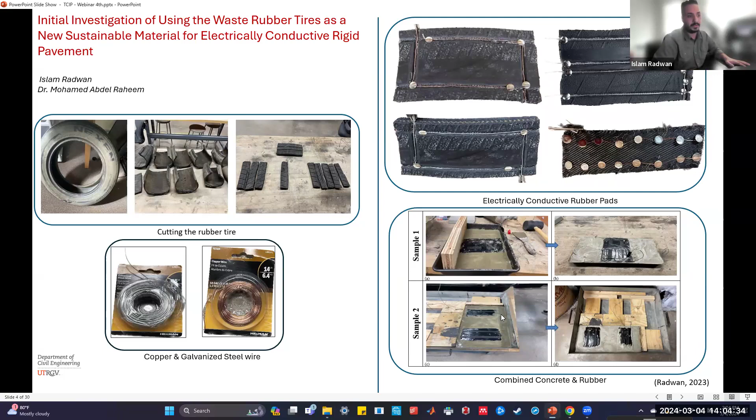We also did an experiment for snow melting. For combined sample one, after 60 minutes, the surface was completely dried while using ice cubes. The same thing for combined sample two while using crushed ice - after 40 minutes, we can see the snow disappeared.

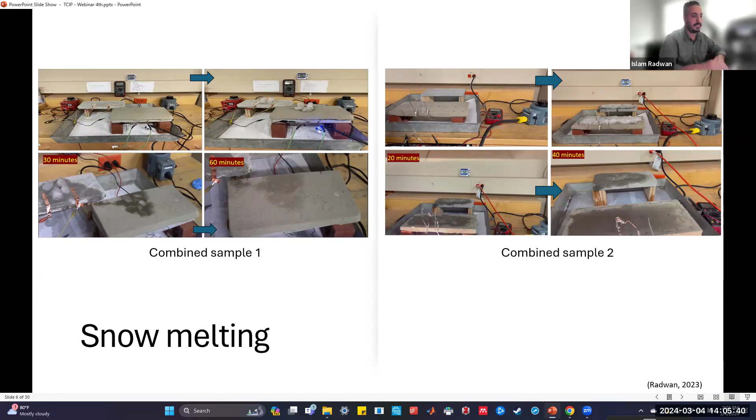That project motivated us to keep working on solving thermal problems related to precast concrete or rigid pavement. So getting back to our current project, which is cool pavement for mitigating the urban heat island effect using phase change material in precast concrete.

So at the beginning, what is the urban heat island? Urban heat islands are areas in cities that are significantly warmer than the surrounding rural areas due to urban development. Some studies say the ambient temperature of 450 cities increased due to the urban heat island phenomenon, which can negatively affect energy consumption, the environment, and people's health.

The same applies to forecasts of future cooling energy consumption related to residential and commercial buildings. They say that by 2050, it may increase up to 750% and 275% due to local and global climate change, and also the expected rise in cooling system use.

So what causes the urban heat island? Some of the main reasons are the surface properties. Urban heat areas have heat absorbing surfaces such as asphalt or concrete, and also the low albedo of these surfaces. The expression albedo means the ability of the pavement to reflect heat. So the lower the albedo, the more absorption by these surfaces.

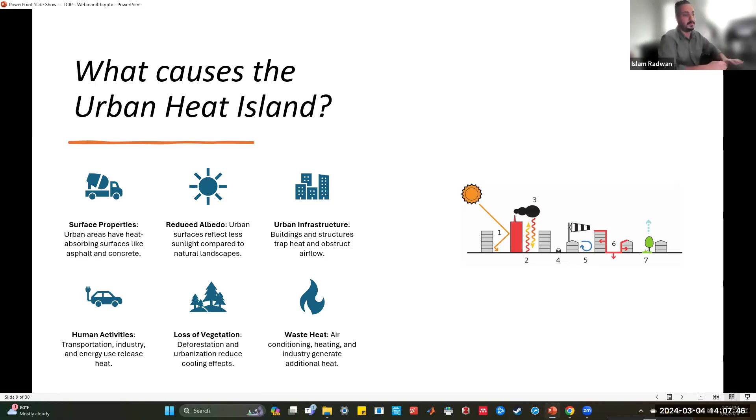So what can be the consequences of the urban heat island? Of course, infrastructure damages, because the extreme temperature causes thermal stresses, which can lead to cracks, warping, and compromise the integrity. Of course, it's going to result in overall higher temperatures within the cities. Also, the health risks—elevated temperature increases the risk of heat-related illnesses.

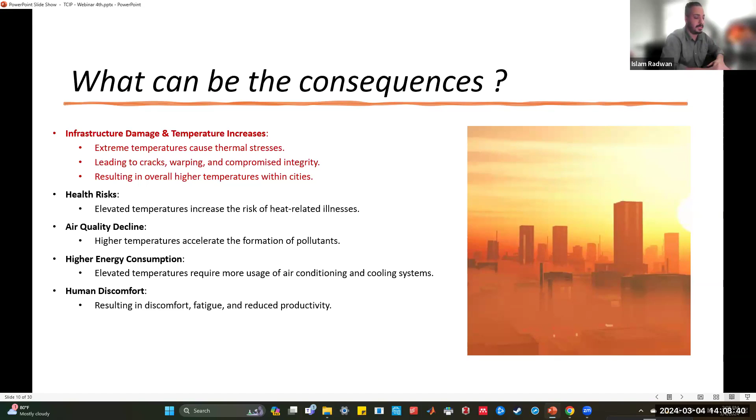Also, air quality—higher temperatures accelerate the formation of pollutants, leading to higher energy consumption. Elevated temperatures require more usage of air conditioning and cooling systems. Also, human comfort will be affected. The higher the temperature, the more it results in discomfort and fatigue, reducing the productivity of working.

So for surface heat islands, a study by Akbari and Rose found that between 29 and 39% of the urban heat island effect is related to paved surfaces. Therefore, the impact of pavements on urban heat island development is significant. That's why working on cooling the pavement is going to contribute to solving the urban heat island effect.

The cool pavement strategies—a lot of researchers have conducted several cool pavement strategies in their research. For example, some of them work on reflective asphalt pavement or reflective concrete pavement, trying to increase the albedo of these surfaces, or increase the reflectivity of the surface. Some of them work on making the pavement porous or permeable.

Also the water retentive pavement. Some of them work on heat harvesting pavement by extracting the heat or taking advantage of this heat, or making the pavement thermally conductive by adding thermally conductive materials such as carbon fibers or carbon black powder, or even metals sometimes. However, one of the most promising ways to cool the pavement is the integration of

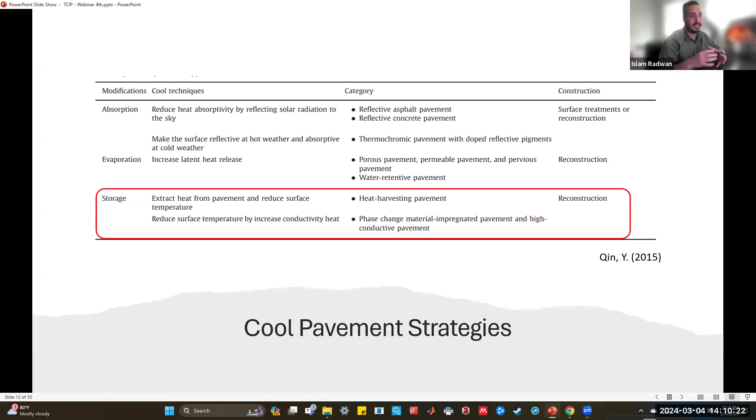phase change materials. The phase change material has unique characteristics of heat capacity, and that's what I'm going to describe in the next slides.

So the phase change material—what is it at the beginning? It is a heat fusion substance that melts and solidifies at a certain temperature. If we look at this curve, the temperature for the phase change material increases while the heat increases as well. This phase is called the sensible heat, until it reaches the melting point, which is 20 Celsius. At this point, the main characteristic of the phase change material works, which is it starts storing the heat, and all the heat becomes latent heat.

And this is the main characteristic that we are trying to take advantage of in the pavement. We are trying to increase the heat capacity of the pavement. We are trying to make the pavement store the heat, and we are trying to make the pavement temperature constant at this temperature as much as we can.

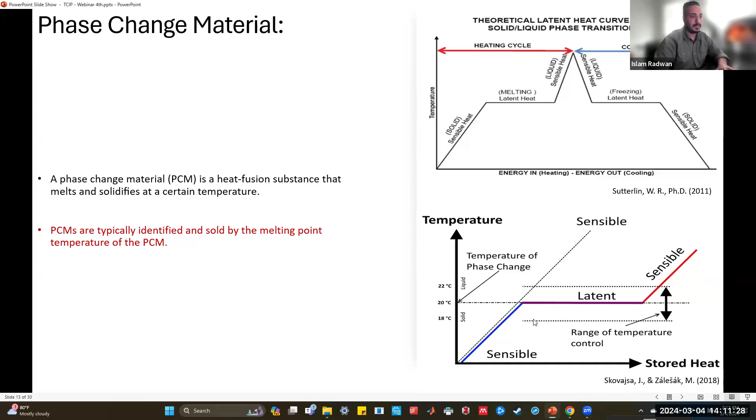So some applications of PCM—phase change materials exist as products in the market. In building construction, they use it for insulation, roofing materials, for thermal energy storage; they use it for solar power plants, for textiles as well, sportswear for temperature control and comfort; also for electronics cooling, food and beverage industry, the automotive industry, and medical applications for temperature controlled storage of biological samples.

Phase change material can be divided into three main types: organic, inorganic, and eutectic. Worth noting that in our research we're using the organic paraffin type. One advantage of organic PCM is that it's chemically stable and it's strongly recommended for construction materials. Inorganic PCM is corrosive to metal, so it's not effective for reinforced precast concrete. That's why we're using the organic type.

Researchers have developed four incorporation methods of PCM to use inside concrete. The first is LWA, lightweight aggregate. They use porous aggregate and immerse the PCM in liquid state inside the porous aggregate, then use that aggregate to make the concrete.

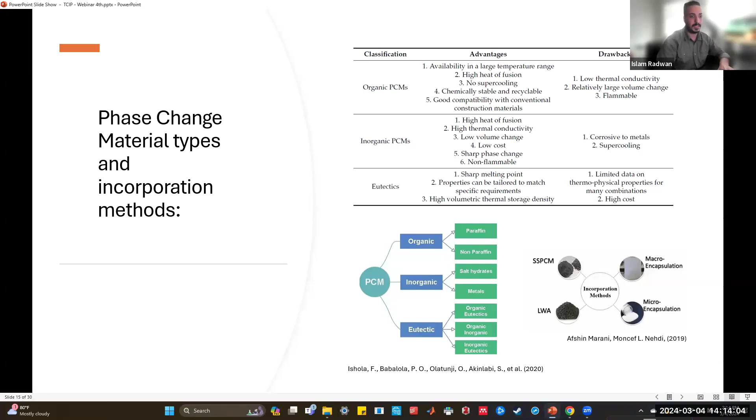The fourth one is micro encapsulation. I want to highlight that we are using this method in our research. The reason is because the product comes in powder form, which is easier to use in the concrete mix. That's why we are using micro encapsulation.

So, research main goal and scope of work. As mentioned, this study aims to explore the integration of microencapsulated phase change materials into rigid precast concrete pavement. The picture describes exactly what we are trying to do.

The phase change material is going to be inside the precast concrete, and here's the mechanism of the PCM. The PCM is in solid state, and once the temperature goes up, the latent heat phase starts, and it becomes completely liquid. Then the latent heat becomes sensible heat, and at night, while going back to the solid state, all the stored heat is released. That's what we are trying to obtain.

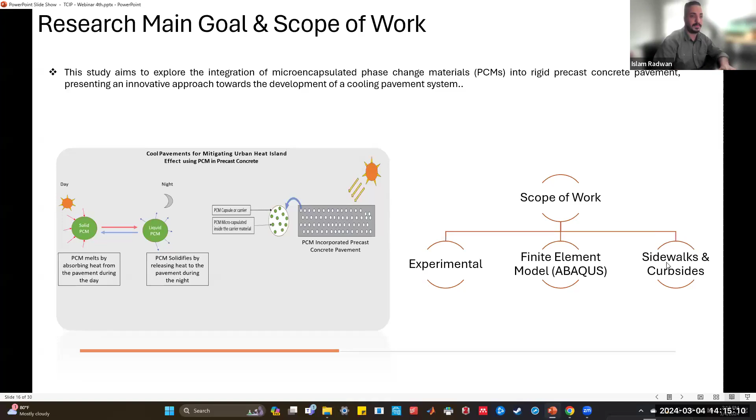Our scope of work includes an experimental phase, and also a finite element model using the ABAQUS software. Initially we are working on sidewalks and curbsides. We can divide the experimental work into four phases: the setup, the material, the physical material integration, and then the equipment.

This is a schematic heat simulation setup of the experiment we are trying to build. As we can see, it's a slightly big chamber surrounded with aluminum wrap and insulation. We have two stands, each with two light bulbs, which act as a heat source on the surface of the two samples.

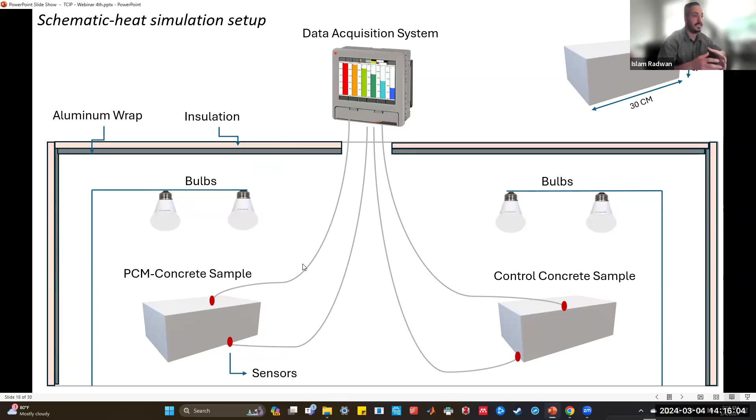We have a PCM concrete sample and a control concrete sample without any PCM. Both are connected to a data acquisition system by sensors to monitor the rise in temperature and also the rise in heat.

The first thing we did was contact a company called Microtek Laboratories. We gave them a brief about our project, and they gave us recommendations for two products. I want to highlight that the two products are already microencapsulated.

One of the main factors we considered when selecting the types of PCM was, as mentioned, the need for dry powders, since we need the PCM in powder form. Also the melting point, which is 28 Celsius, is one of the critical factors when it comes to PCM selection, along with the heat of fusion. The same applies for the MPCM 28 and the Micronal 28.

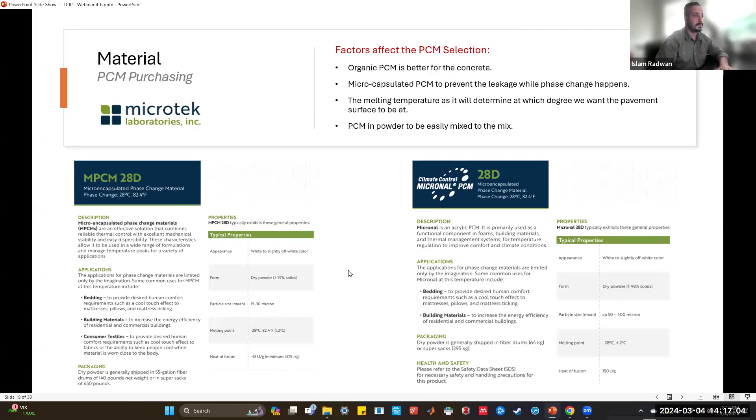Those are real pictures of the mixing. On the right-hand side, we can see the control concrete sample with 0 phase change material. We used the ratios 1 cement, 2 sand, 3 gravel, and 0.6 water ratio, and the coarse aggregate grade was grade 8.

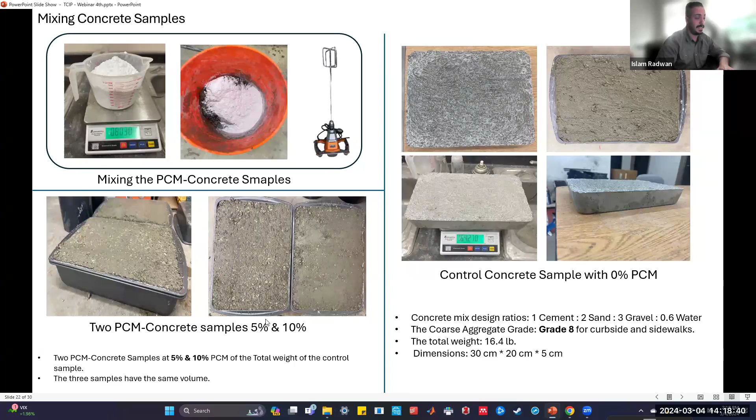On the left-hand side, we can see the mixing process of the PCM. As I mentioned, the PCM is in powder form, and we added it at the last step because it was strongly recommended to add the phase change material last in order to avoid breaking the shell of the microcapsule of the PCM. We made two PCM concrete samples, 5% and 10% of the total weight of the control sample. So we have 3 final concrete samples: 0 phase change material, 5%, and 10%.

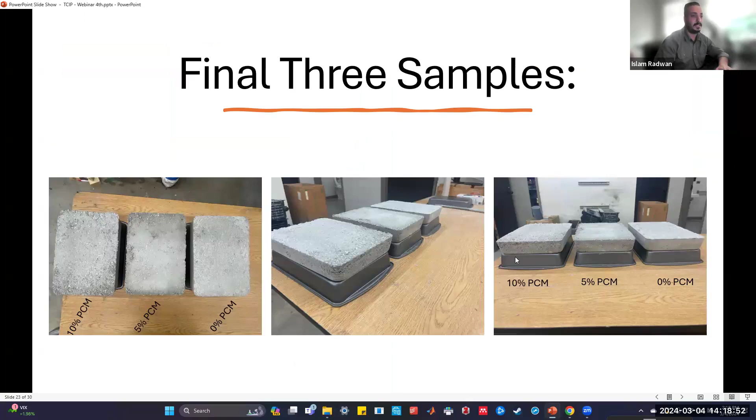On the other side, working on the finite element model, this picture describes most of the heat interactions on the pavement. Between the layers, between the concrete layer and the base layer, there is conduction, and also between the base layer and the sub-base layer, there is conduction too. The interaction between the concrete pavement and the atmosphere is called convection.

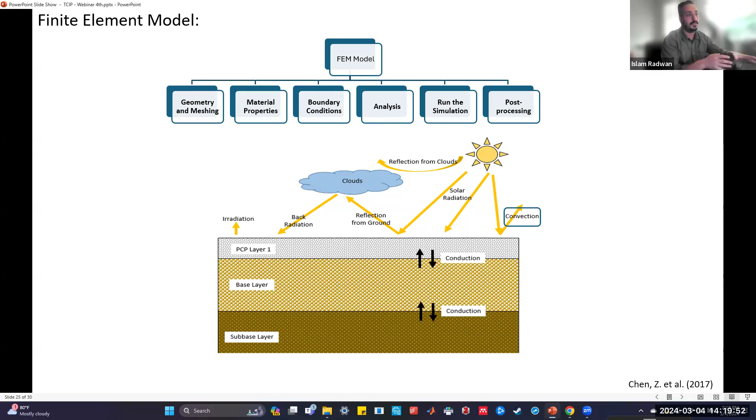I just want to highlight that one of the most important and critical steps for the finite element modeling is defining the material properties, because after adding the phase change material to the concrete it has new thermal properties. That's why we went to the second step to measure these thermal properties for our samples.

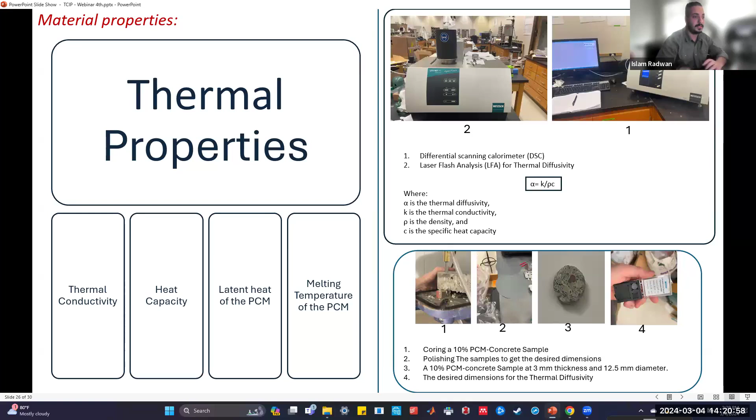I want to highlight that those are the main thermal properties we need to model the finite element modeling: the thermal conductivity, the heat capacity, and also the latent heat of the PCM, the melting temperature of the PCM. This picture shows the process to prepare the sample to use in these devices.

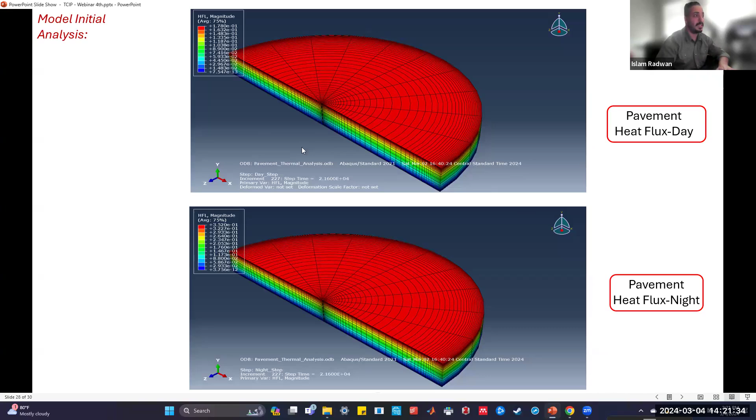Those are initial results for the model we did. The picture at the top is for the day step, and the one at the bottom is for the night. We can see here the heat flux on top of the pavement during the day is less than the heat flux on top of the pavement during the night. And that's exactly what phase change material does—it delays releasing the heat until the night comes.

Some expected results for this current research: of course, the surface temperature is going to be regulated due to the addition of the PCM, and also the heat capacity. As I mentioned, the heat capacity characteristic of the phase change material is really useful, so if we add it to the concrete mix, the concrete sample's heat capacity characteristic is going to be increased too. Both of these are going to affect the mitigation of the urban heat island. As I mentioned, the PCM absorbs and stores excess heat during the day and releases it gradually at night.

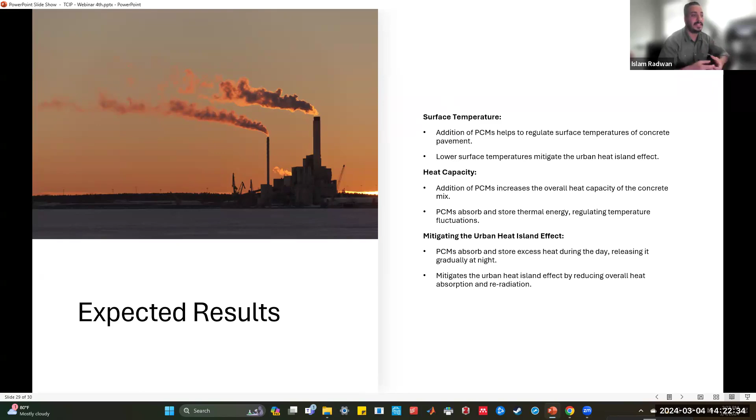That's it. Thank you.

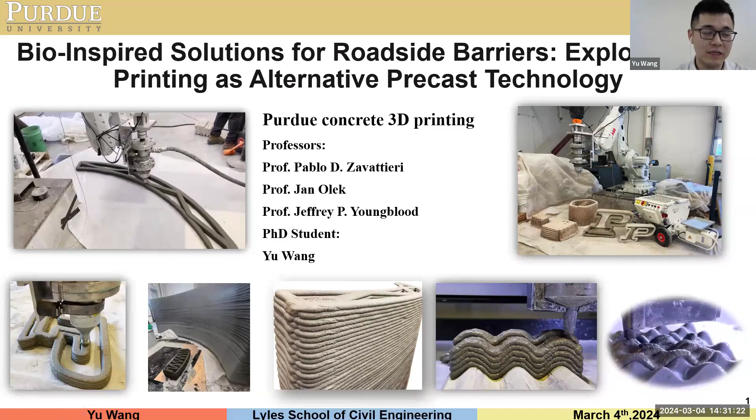I'm Yu Wang, I'm working on 3D printing concrete at Purdue University. Today I'm just going to talk about our project on bio-inspired solutions for roadside barrier applications. We are exploring 3D printing technology as an alternative to precast technology. So let me, in the next probably 5 to 7 minutes, do a brief introduction.

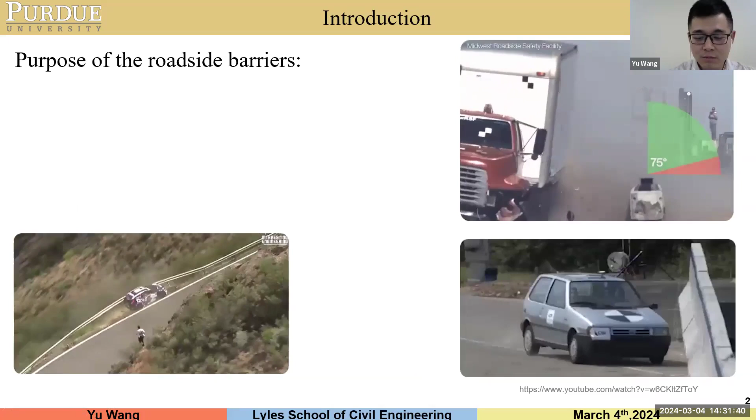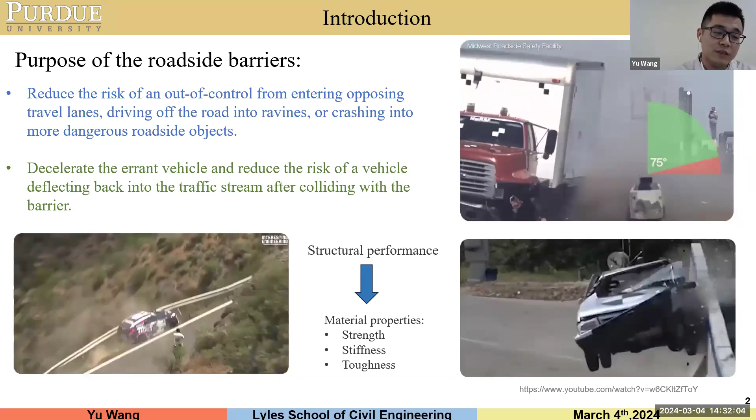About the roadside barrier: what is the purpose of the roadside barriers? The main purpose of roadside barriers is basically to redirect the vehicle and decelerate it to reduce the risk of the vehicle crashing into more dangerous objects. The structural performance is really important, and the material performance is also really important. In order to get good structural performance, we need to leverage the strength, stiffness, and toughness of our concrete materials.

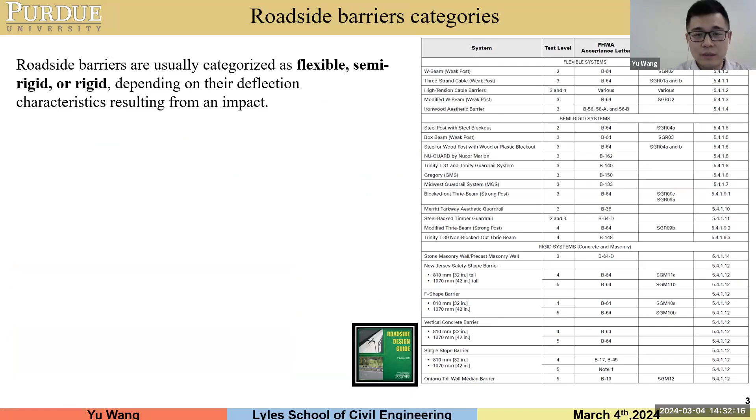From the AASHTO Roadside Design Guide, the barriers are categorized into three types. Flexible barriers are typically cable barriers and plastic barriers, semi-rigid systems like metal guardrails, and rigid systems, which are typically concrete barriers considered as rigid systems.

Different kinds of barriers have different applications, used in different test levels. Before a barrier is put into service, it needs to go through what we call a full crash test. These crash tests are leveled from TL1 all the way to TL5. TL1 to 3 are typically small-scale testing with small cars and pickup trucks, and when we come to TL4 and 5, they need to be tested under large trucks.

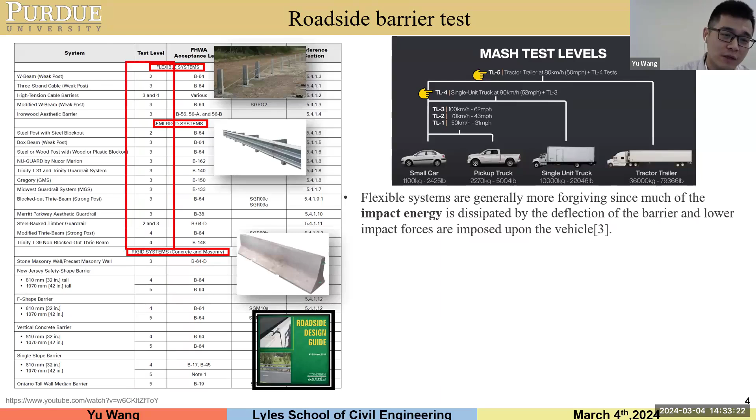Typically, flexible systems are more forgiving because of their flexibility, and more impact energy can be absorbed during impact. However, considering the strength limit, they can only be used under low level tests. If you see the table, they are mainly used under TL2 and 3. When we come to TL4 and 5, traditionally we consider the concrete barrier because of its ability to resist high impact loading to better redirect the vehicle.

Also in the table, when we come to TL4 and 5, there are a lot of different shapes of concrete barrier. Concrete barriers have a lot of advantages like high strength, and are also cost-effective compared to other systems. But all concrete barriers are considered rigid systems, which means they do not absorb energy during impact—they can only resist the impact load to redirect the vehicle. So can we augment the functionality of concrete to improve its energy absorption capacity?

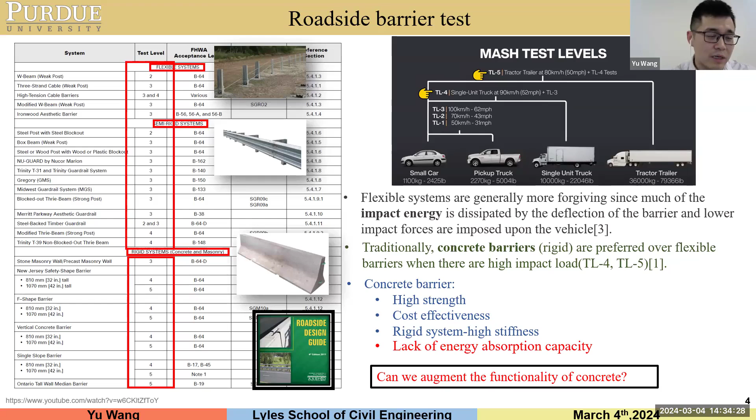So there are currently some solutions, let me explain a little more. Currently, concrete barriers have different shapes, like jersey barrier, F shape, single slope shape. There are about 5 shapes approved by AASHTO.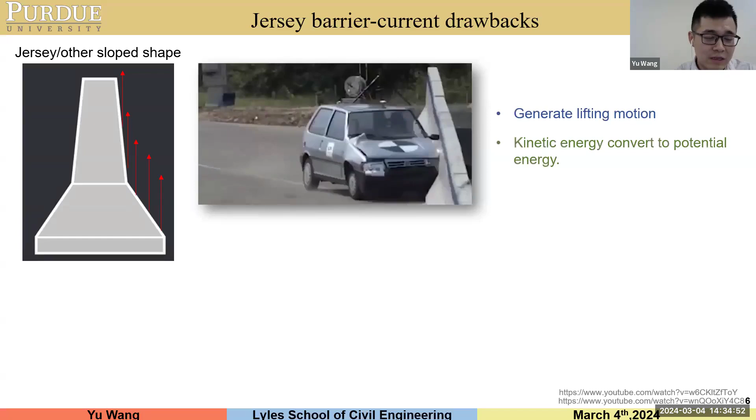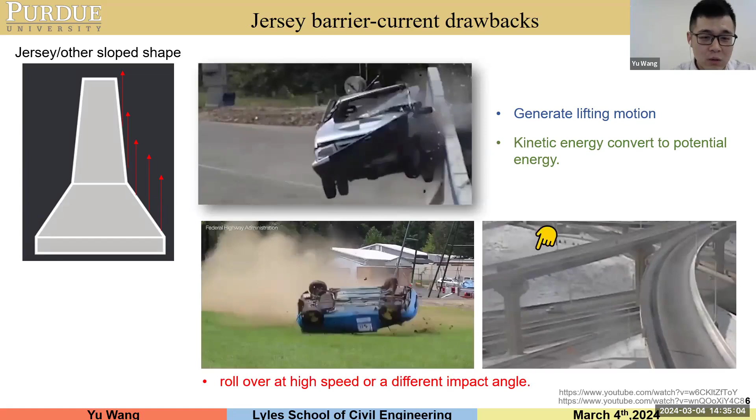How does the jersey barrier work, which you commonly see on the highway? When a vehicle rides up to the barrier, it generates a lifting motion. This lifting motion can dissipate some of the kinetic energy to redirect the vehicle and reduce the energy imposed on the car. However, under certain situations, like high speed or different impact angles, there's a chance it can cause a rollover of the car because of the lifting motion.

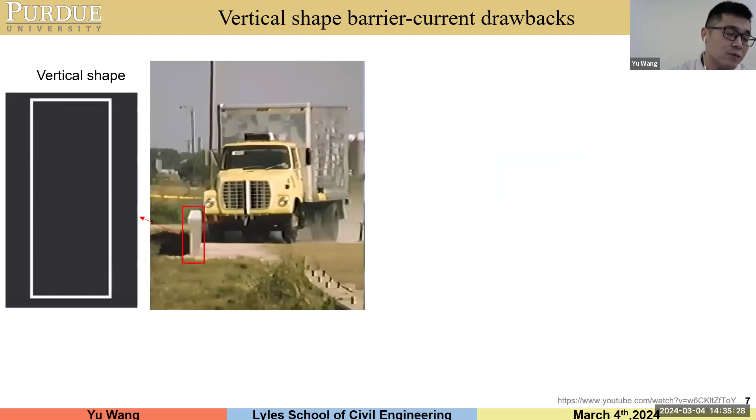So how do we address this drawback? How do we prevent this lifting motion? Maybe we can use other shapes, or we can improve the energy absorption capacity of concrete. There's a different shape, the vertical shape, which based on the design does not have a sloped shape that would lift the vehicle when it rides onto it.

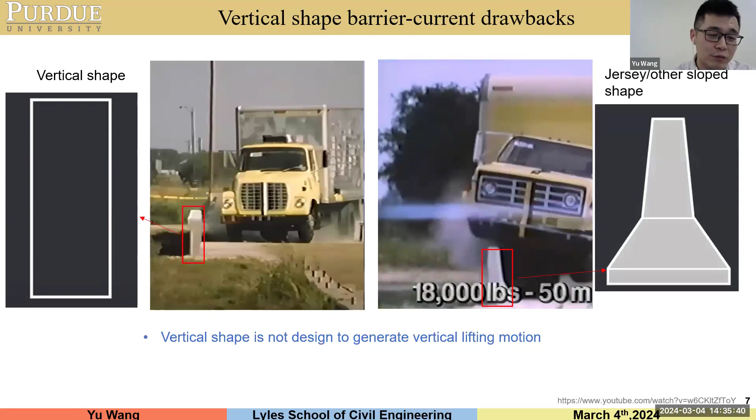It can prevent the lifting motion, which can prevent rollover, especially on large trucks. But if we drive on the highway, we typically do not see the vertical shape. This is because it does not generate the lifting motion, which means most of the energy is imposed on the car, which will cause more damage to the car compared to the jersey barrier.

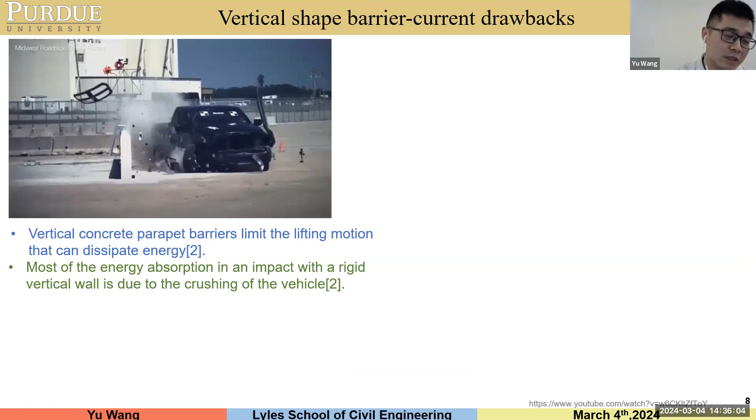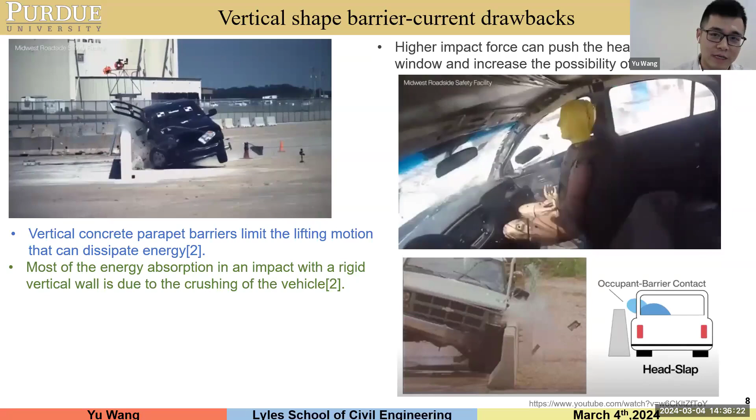And if there's a high impact loading, there will be what we call a head slap. If there's high lateral impact force, the passenger's head can pass through the window, and if the barrier is tall, there's also the possibility of crushing against the concrete barrier, which is really bad and can cause the death of the passenger.

So this brings us to the point that the existing concrete barrier is strong enough to redirect the vehicle back to the lane, but it has a drawback in protecting the driver and passengers. So that brings us to our point.

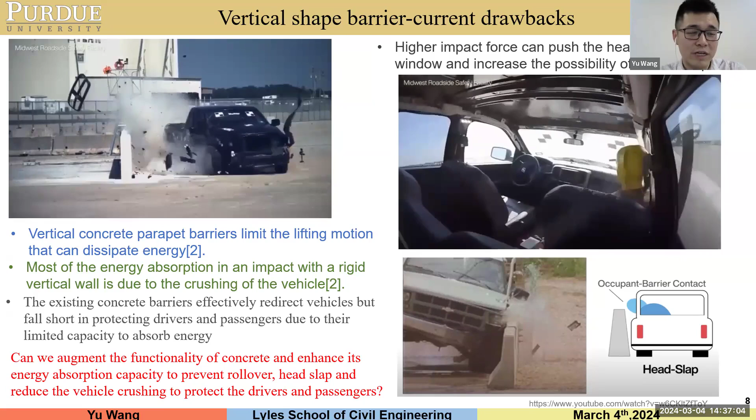Can we improve the energy absorption capacity of concrete barriers? Can we augment the functionality of concrete to improve the energy absorption of the concrete barrier to protect the driver and passengers? There are a few current studies and current solutions.

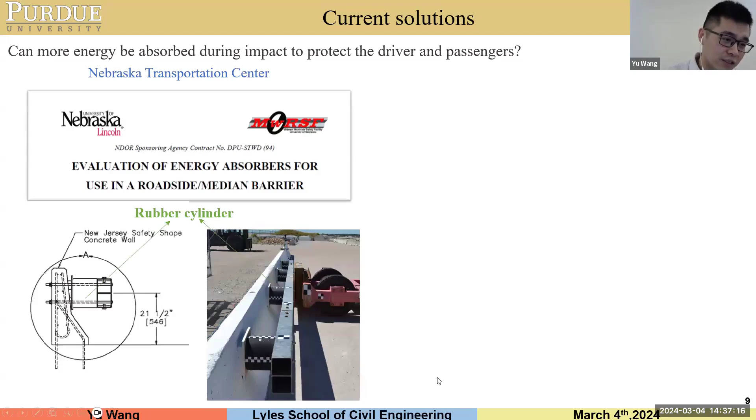The Department of Transportation of Nebraska did a study. They attached rubber cylinders in front of the concrete barrier, so during impact there will be more deflection, so more energy will be absorbed. However, because we add another layer of material, the rubber and the metal, it adds another layer of cost.

And also, after each impact, it will have plastic deformation, which means after each impact you need to replace the system.

Also, there's another system approved by FHWA that they call the cushion wall system. When there are high frequency lateral impacts, this system can be used in the design. However, as you see here, it takes up a lot of the roadway and shoulder space, and you need to replace it after impact.

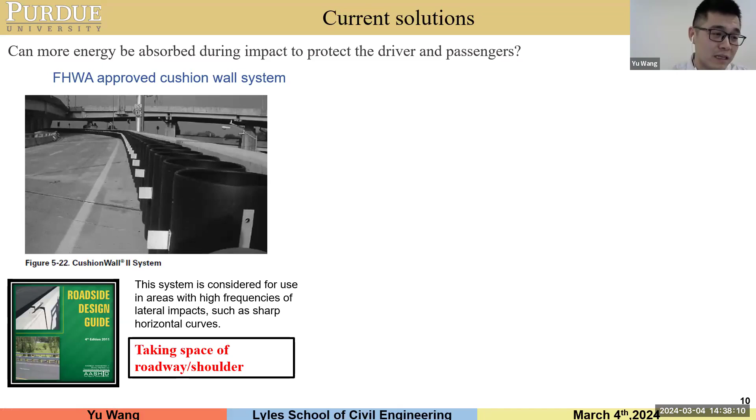There's also another study about using engineered cementitious composite for energy absorption purposes, from the Louisiana Department of Transportation. But engineered cementitious composite is also a kind of expensive material. So none of these are really widely used due to different limitations.

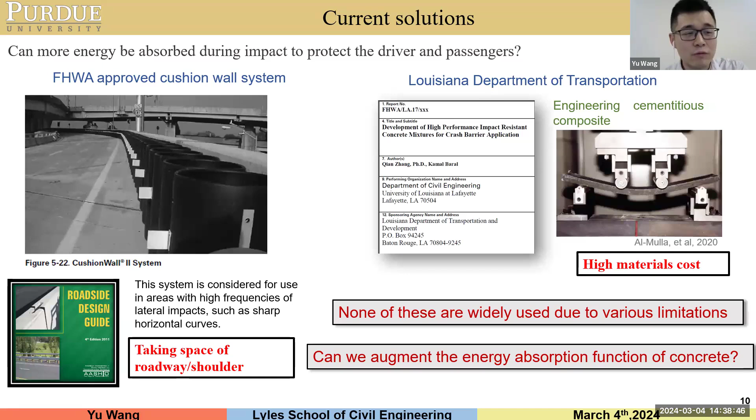So can we augment the energy absorption capacity just for the concrete? So we don't add rubber, and we only improve the energy absorption of concrete.

So how do we augment the functionality of concrete? For example, for a rigid concrete barrier, because of the stiffness, the energy absorption capacity is really limited. But can we have our concrete barrier absorb more energy during an impact so we can protect the driver and passengers?

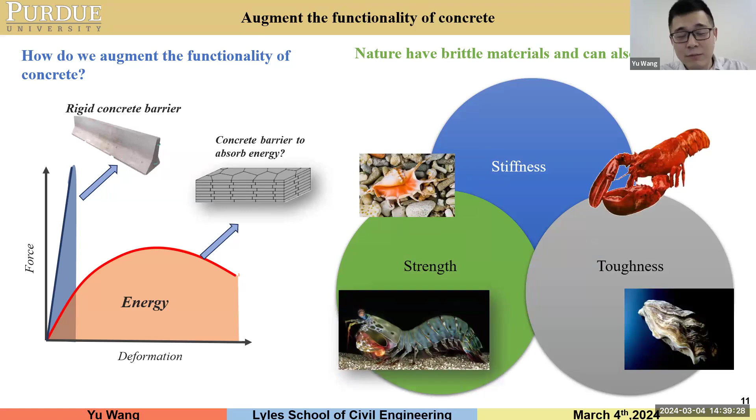Luckily, in nature there are a lot of examples. Nature uses brittle materials, however there are a lot of materials that can still resist impact force, like lobsters, like mantis shrimp or nacre. They are all kind of stiff material, but they can still resist impact loading.

So how have we used what we learned from nature to augment the functionality of concrete to improve the energy absorption capacity of concrete?

So first, of course, we start with the loading condition. We want to improve the impact resistance, so we come to improve the energy absorption capacity. And then we learn from nature what is the microstructure and what is the material of the organs of different animals. And then we study what is the real damage mechanism for that, to improve the energy absorption capacity.

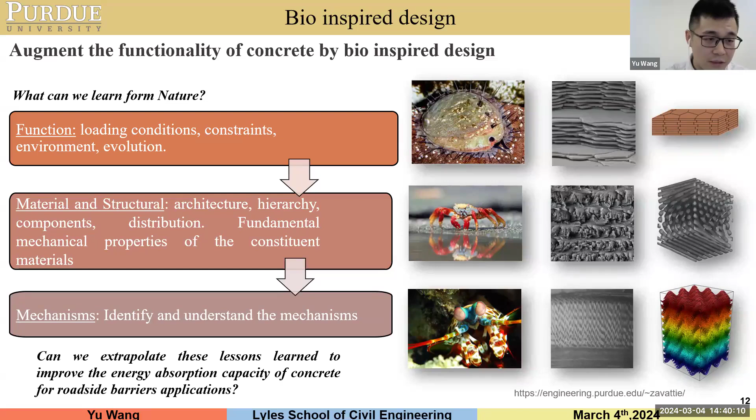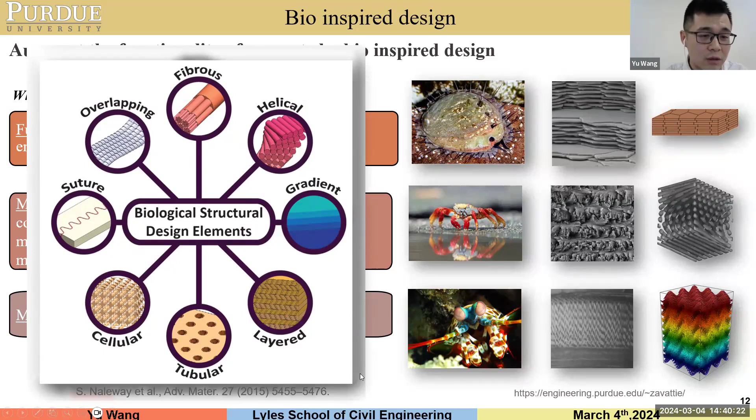And there are a lot of structures already found for different applications, like helicoidal or gradient or cellular structures. And there is also an example damage mechanism.

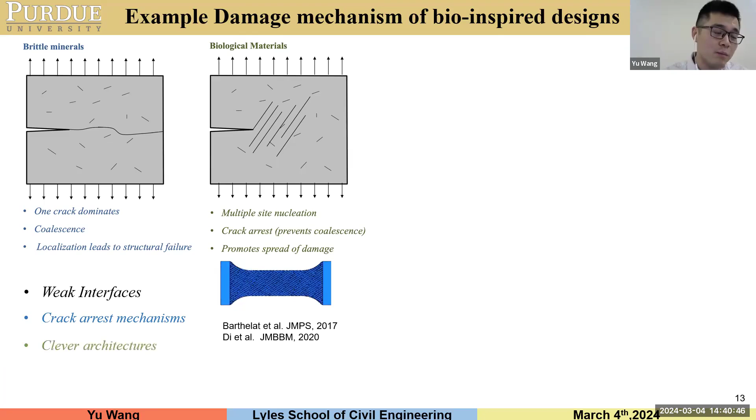For example, for brittle material, there is always a fatal crack. However, for biological material, because of the presence of interfaces and because of the clever architectural arrangement, it can promote micro crack development, so it can improve the toughness and improve the energy absorption capacity.

And then for 3D printing concrete, with the layer by layer manufacturing process, we always impose defects and interfaces in our system. So this gives us a chance to take advantage of these interfaces, to take advantage of what we learn from nature to improve the energy absorption capacity of concrete.

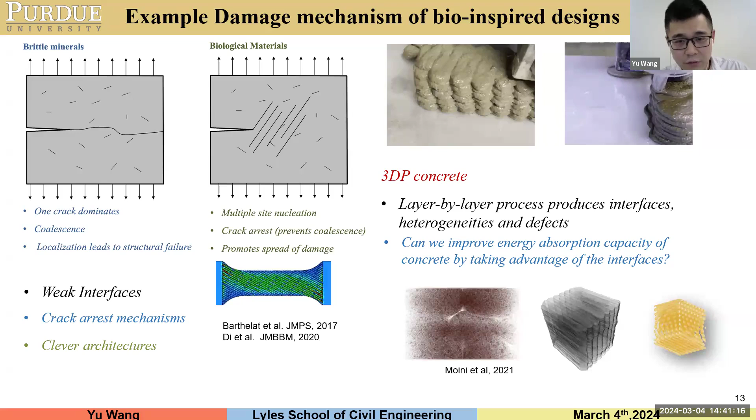For bio-inspired design, it's typically a bit more complex than normal concrete, which means for the traditional cast construction method, it will be hard to manufacture these designs. But for 3D printing concrete, it gives us this opportunity, because basically we use digital manufacturing technology. The only thing we need to do is manipulate the toolpath with the concrete material. This will give us different architectures which can enable new functionality of the concrete.

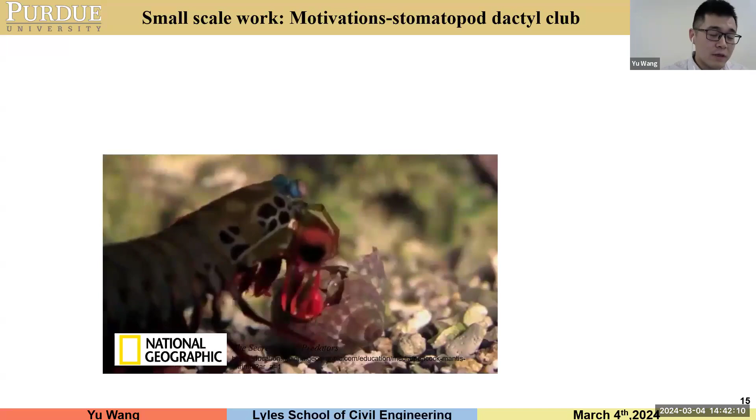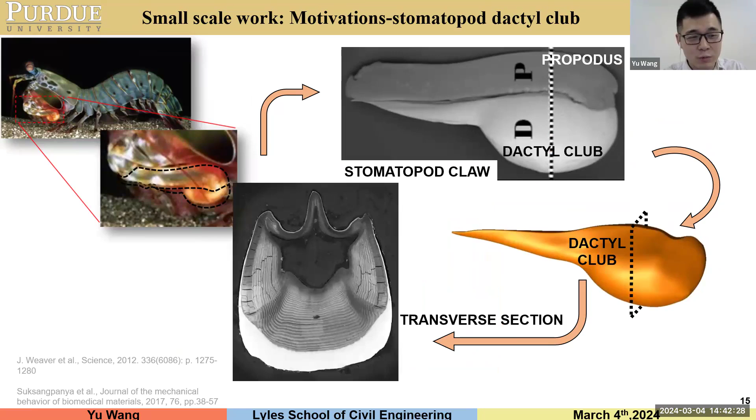Now I'm going to talk a little bit about our work. We start in small scale, and the small scale work motivation is from the mantis shrimp, the dactyl club of the mantis shrimp. If we take a cross section of the claws of the mantis shrimp, it gives us a cross section like this, and the mantis shrimp can smash the snail using really high impact force in 0.1 seconds.

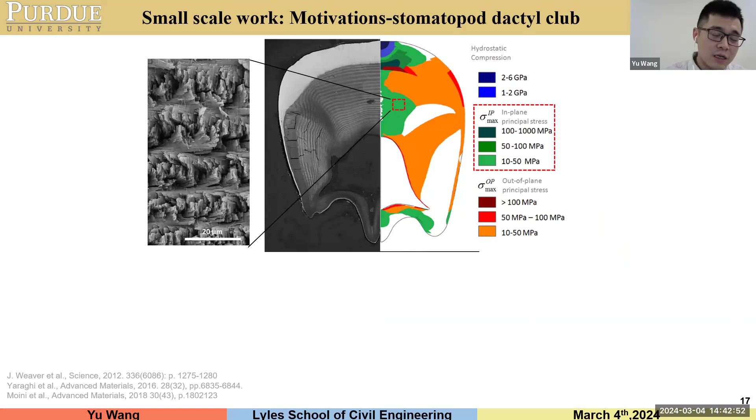So how do this claw and dactyl club absorb these high impact energies? If we run the simulation for the impact behavior of the mantis shrimp, we can get a stress distribution contour. In different regions, there are different architectures. Like in this green region, the researchers found an architecture we can call Bouligand architecture. And in this blue region, which undergoes high compressive stress concentration, there's another architecture we can call the sinusoidal, or helicoidal, or herringbone architecture.

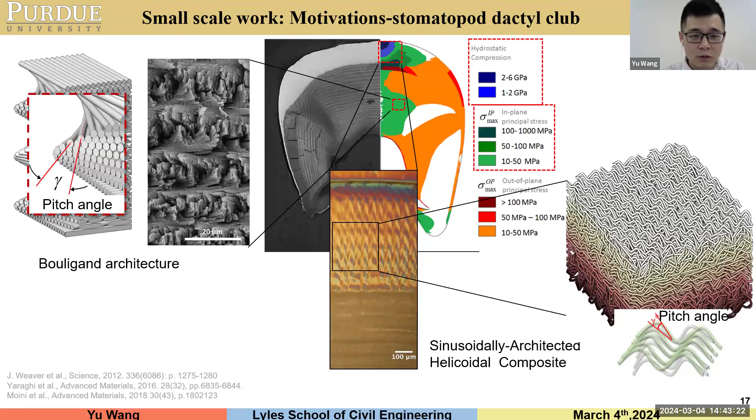So can we use this architecture with 3D printing concrete to improve the energy absorption capacity of concrete, to provide our concrete with a novel functionality? We start with Bouligand architecture. To study this Bouligand architecture, there are two steps.

The first step is to replicate the structure, which is relatively easy - we just need to design the toolpath. However, the second and most important part is to replicate the key mechanism of this architecture. We can call this the interfacial twist crack mechanism. In the dactyl club of the mantis shrimp, they have fiber and matrix with highly anisotropic properties.

This is aligned with a pitch angle between each layer, so when a crack initiates, it can generate a twist crack. And when our sample has a large volume, which means we have a high volume of interface, this structure will promote damage delocalization and promote more micro crack development to improve the toughness of the sample.

So we start to figure out how to replicate this key mechanism, since it's really important. First, we need a highly anisotropic material. We found that when we 3D print concrete with fibers, the fibers preferably align during the printing process, which means if we print in different filament orientations, we will get highly anisotropic properties.

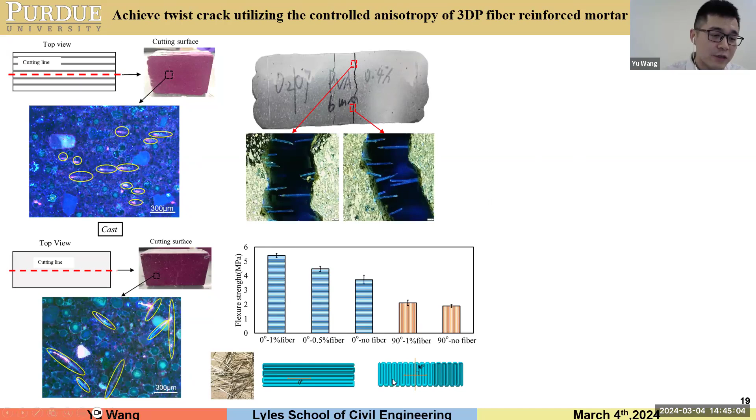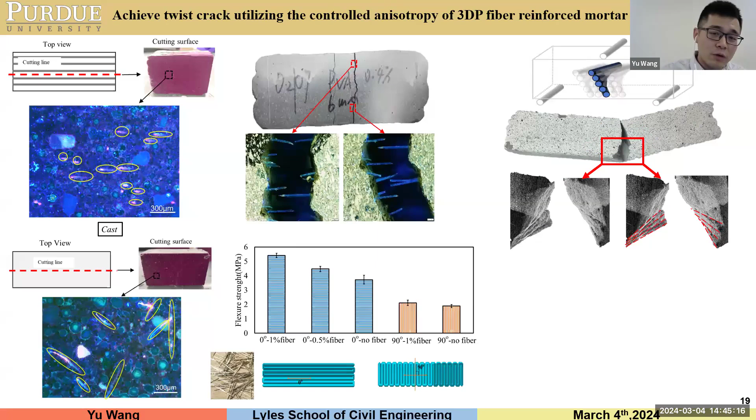So here, for the 90-degree and 0-degree samples, if we test in a 3-point bending test, we will get significantly different flexural stress. Taking advantage of this high anisotropy, we print our sample with Bouligand architecture, and we successfully replicate and achieve the key twist cracking mechanism in small scale. We didn't sacrifice the strength - we didn't intentionally make the interface weaker. We just used the normal printing process and achieved the key mechanism.

The next step is to scale it up to a large scale, where we will have enough layers and interfaces, so we will promote the micro crack development to improve the toughness and energy absorption capacities.

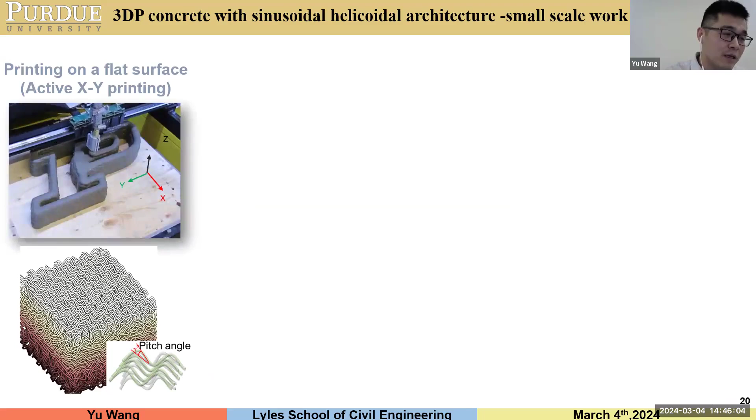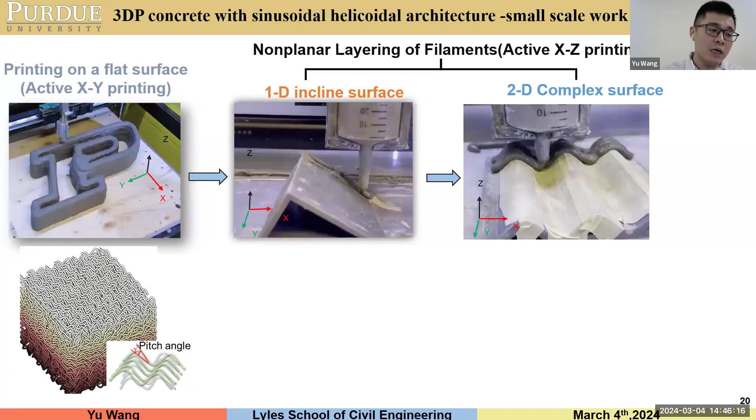The other architecture we also started to look at in small scale is the helicoidal architecture. This is relatively new in 3D printing concrete, because typically when we print concrete, we print in the X and Y plane and build up in the Z plane. For this architecture, we need to study how to print on a 1D surface, and then scale it to a sinusoidal surface to achieve the filament shape of this architecture.

Then we scale this to a 3D surface where we actively print X, Y, and Z with the sinusoidal architecture, with the rotation of each layer, to make it really closer to the real structure found in nature.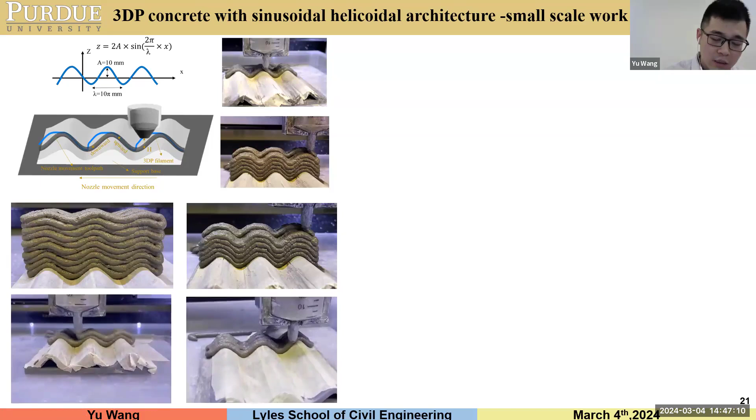The red one, we modify the toolpath to let our sample maintain the sinusoidal shape as we print, so it can be more and more closer to the real structure we found in nature.

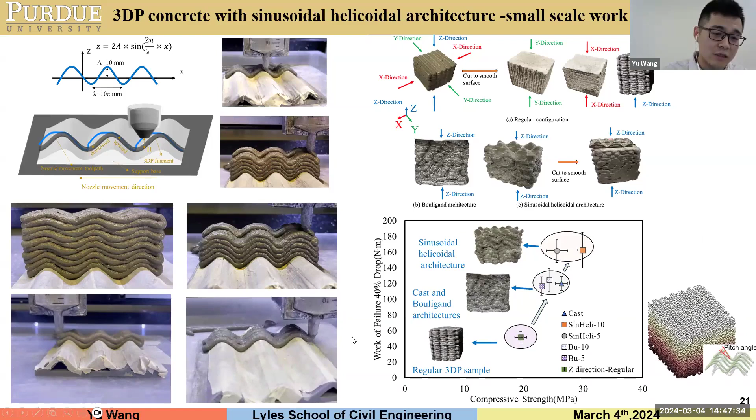We also ran some mechanical testing in small scale, testing the helicoidal architecture, cast sample, and Bouligand architecture, and we found that the helicoidal architecture performed really well on compressive strength and work of failure. It can improve both properties, which brings us an opportunity to scale it up to test the energy absorption capacity of this architecture.

So then I'm going to talk a little bit about our large scale work. Thanks to this project, we started to design our extruder for the 3D printing system, put together an extruder with shear mixing in the extruder head, and started testing it with a large scale wall. We built this wall 3 feet tall, and overall built the system. It's a relatively new system to us, so we started learning, building, and printing at large scale.

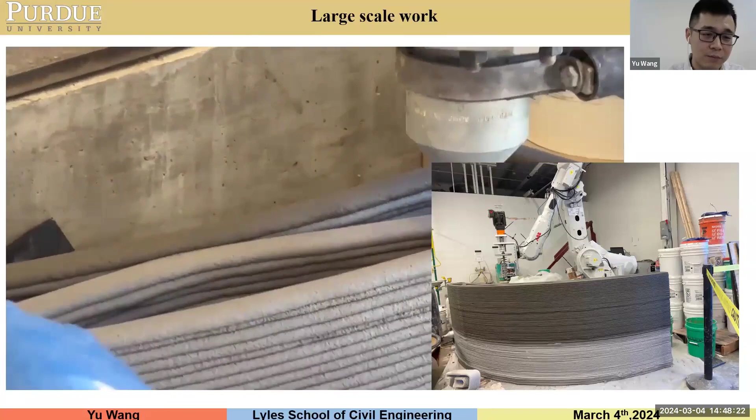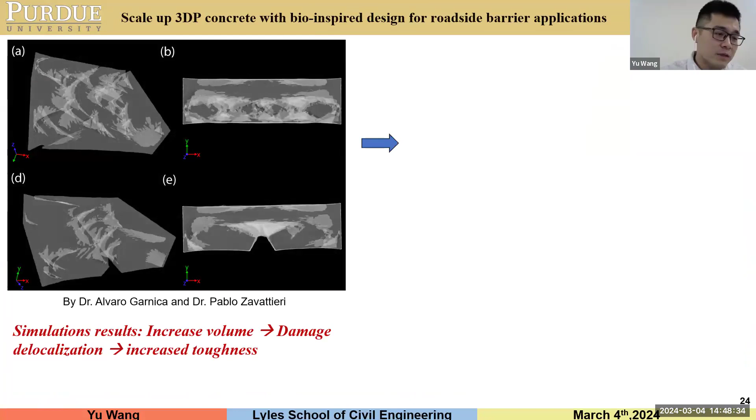So now, using what we learned in this printing process, the next step is to scale up the architected material, architected concrete. In the simulation, we found that if we increase the volume of the sample where we get enough interface, it will promote micro-crack development to increase toughness and energy absorption capacity. So we can scale this up to test the energy absorption capacity, which could potentially be used for roadside barrier applications.

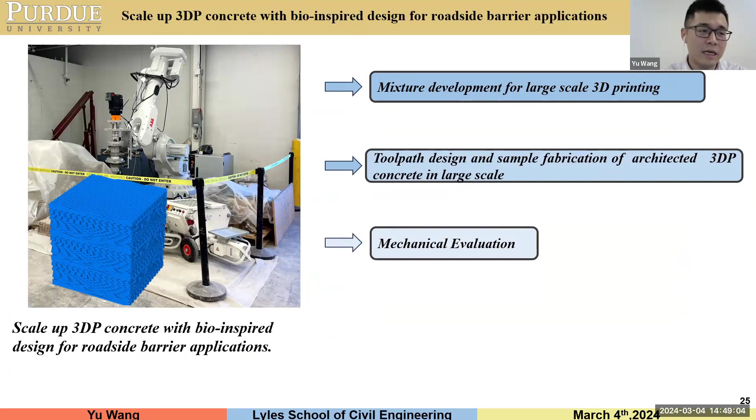But large scale is more complex than small scale. We need to start with material development, then study the toolpath design, and then conduct the mechanical evaluation. So we also start with material development, which for 3D printing concrete, we also want our material to be more cost effective, because as I mentioned before, current solutions suffer from high cost.

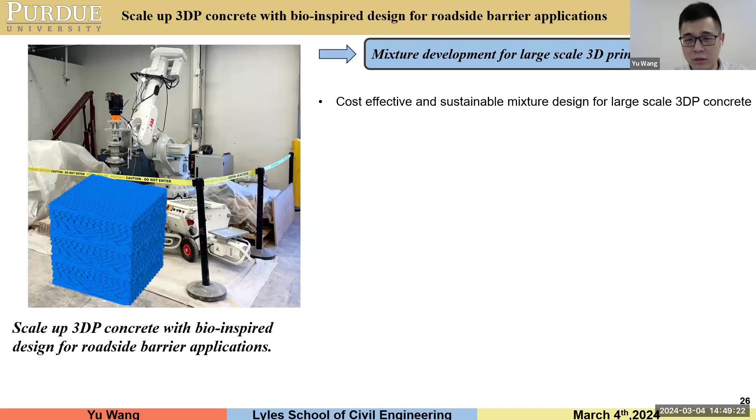We are also targeting making our 3D printing concrete cheaper. For 3D printing concrete, the expensive component is the admixtures, like the modifier admixtures we were discussing. We are studying replacing this admixture with a cost-effective natural admixture, cellulose nanofiber, and we are also studying replacing the cement partially with limestone filler.

So we ran some rheology testing, which shows that cellulose nanofiber can be a really effective viscosity modifier by increasing the static yield stress and viscosity. It can increase the static yield stress by 3,500 Pascal per weight of CNF.

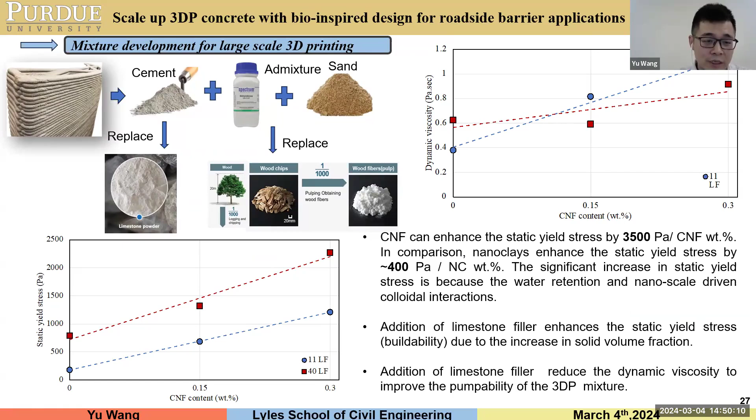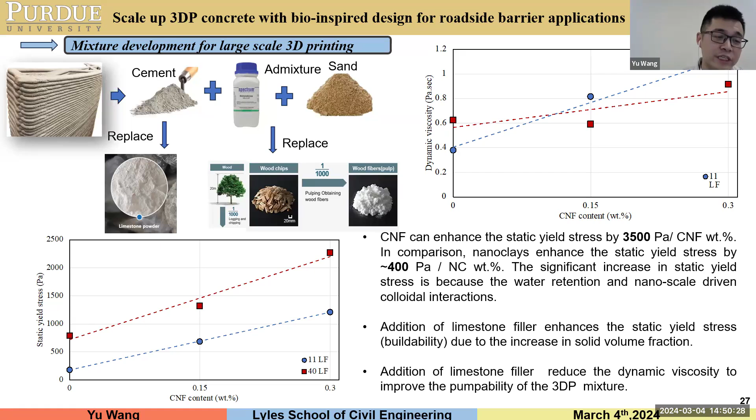Just in comparison, nanoclay is also another studied admixture in the 3D printing concrete field, but it can only increase 400 Pascal per weight of nanoclay. Additional limestone filler can also enhance the static yield stress, which really helps the buildability of the 3D printing concrete and reduces the cost at the same time.

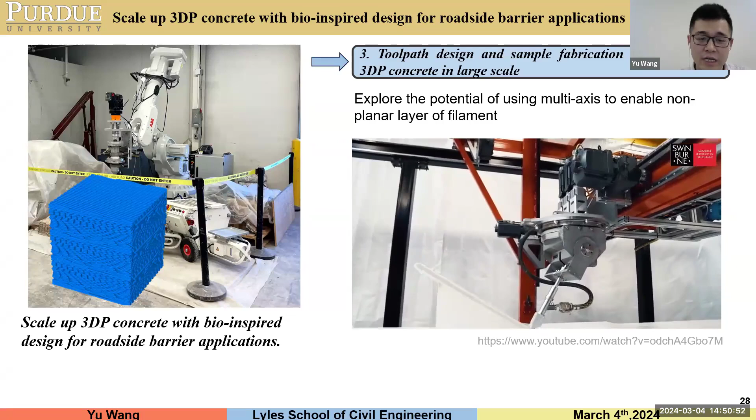So then we also will study the toolpath design for 3D printing concrete, because for the robotic arm at large scale, we have multiple axes, which means we have the room to use multiple axes to print the sinusoidal architecture in different nozzle configurations. It can be perpendicular to the support base.

And the last step is we are going to evaluate the mechanical performance, specifically the impact resistance and energy absorption capacity of the large scale architected concrete, which can potentially be used for roadside barrier applications.

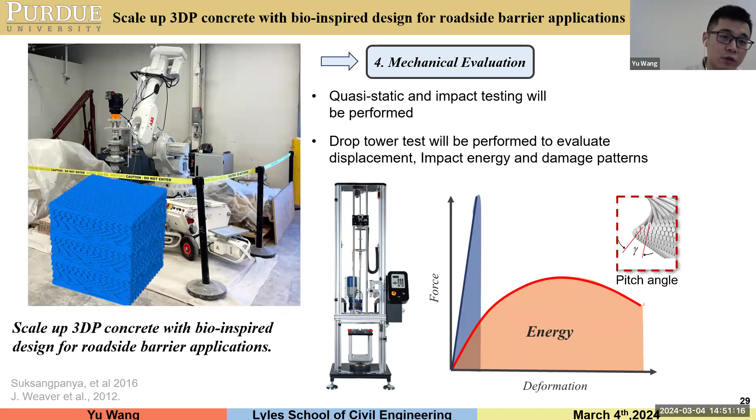These are my references, and that'll be it. So I'm open to any questions.

I can ask one if I may. This is Pinar here. Very interesting work, thanks. Are the barriers typically reinforced?

Yes. Okay, so just curious, what's your strategy for reinforcing it, or maybe it won't be reinforced in the traditional way that we think? It could potentially be reinforced in the traditional way.

That's one way we can do it with 3D printing. We can place rebar manually or automatically during the 3D printing process, so we need to design the toolpath and the way we place reinforcement. The other way, alternatively, we can use fiber reinforcement, which is relatively easier for the 3D printing process. So these are the two ways that can potentially be used for reinforcing.

Okay, thank you. I know it's always a challenge with 3D printing. Yeah, it's a challenge. So, yeah. Okay, thank you.

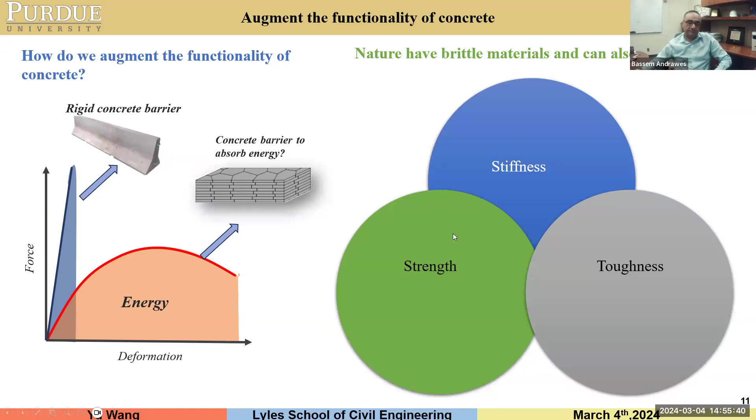All right, any other question? Can I ask a question about the printer itself? Is this commercially available, and does it require special installations in a lab facility on campus? What are the ingredients you've been using to build the wall? Is it a regular mix or a special mix?

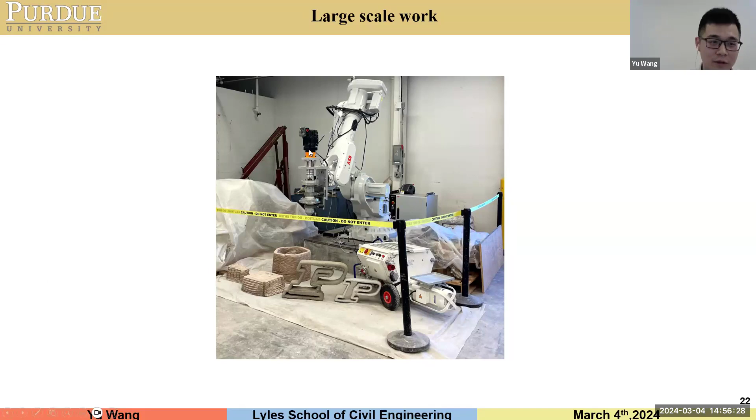Oh sorry, is your question about the printer or the mix? The printer and the concrete that you used. Oh okay, so the printer - we bought this robotic arm and this pump. Those are commercially available, but we built this extruder with another postdoc in our group. We incorporated the shear mixing capacity in the extruder, and we also built our own concrete base and support on a metal plate to prevent the rollover of the robotic arm.

And for the material, we are developing a mixture that could be more cost effective and more sustainable. For 3D printing concrete, the most important and most expensive parts are cement and admixtures. So we are trying to replace cement with limestone filler to some extent, and also trying to replace expensive commercial admixtures with more natural source admixtures, like cellulose nanofiber, which is more cost effective than commercial admixtures. So we are developing our own materials.

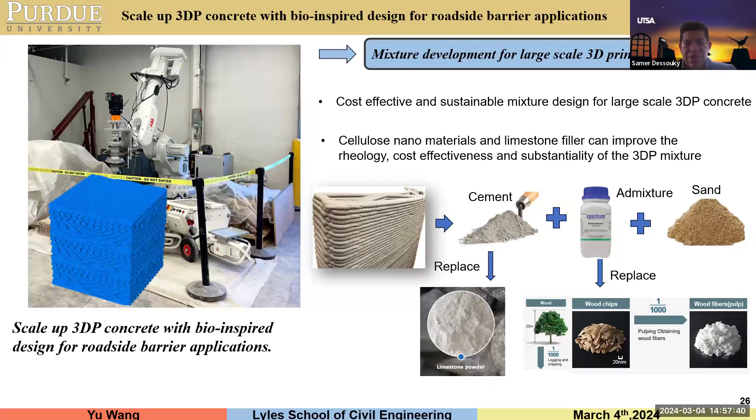Oh, thank you. Yeah, thank you. All right, if there are no other questions.